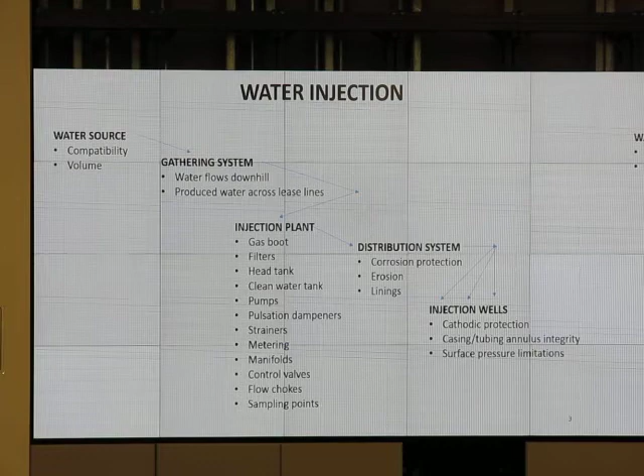Water flood plants can be in a lot of places. This is the Wabash River in Indiana, and all the buildings are up on 8-foot stilts, and most of the time you can drive to the water flood plant.

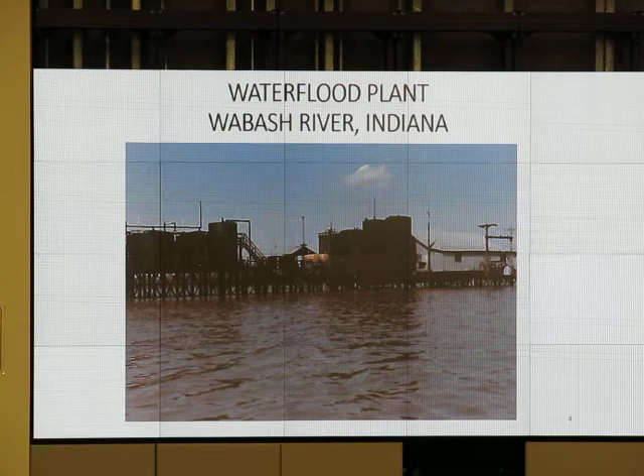The tanks feed the pumps that are inside this station - this is tank battery equipment. But when the Wabash River floods, the only way you get to the water flood plant is in a boat. And then the water recedes, and the only way you get out there is in a four-wheeler. And then it dries up again, and you're on the ground. So 'water plant' and 'water flood' take on some new meanings sometimes.

Water quality - what do we mean when we talk about quality of water? We've got to be concerned about a reservoir that, even though the fluids came out of it, we're going to try to stick it back in the ground, and that water's got to meet certain specifications. Here's some criteria for quality injection water, whether it's going in a disposal well or whether it's going in a water injection well for pressure maintenance. It can't contain particles large enough to cause formation damage. And those particles can be solids, they can be oil, or they can be gas. All of those need to be treated as contaminants in water.

Quality injection water will not cause corrosion. In other words, the water itself, if we have a lack of oxygen, is harmless. If we left oxygen in there with the water, then we've created a corrosion cell.

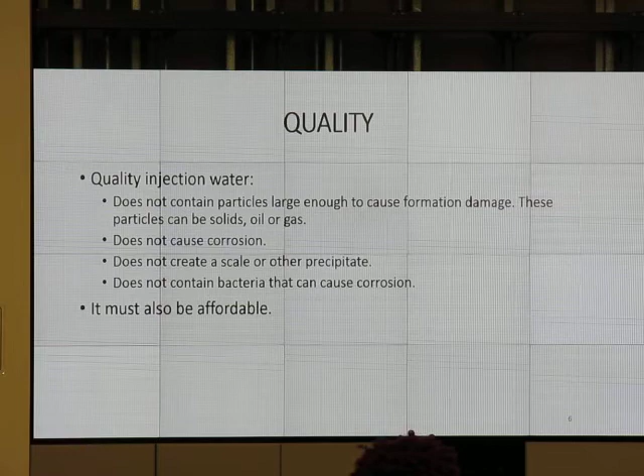And we drink it like it's water. So water can become a very precious commodity, and if we are paying those kind of prices in the oil field for our injection systems, we're not going to have very many economic water floods. There are some ways of treating water, but however we treat the water, it's got to be affordable for the use that we intended.

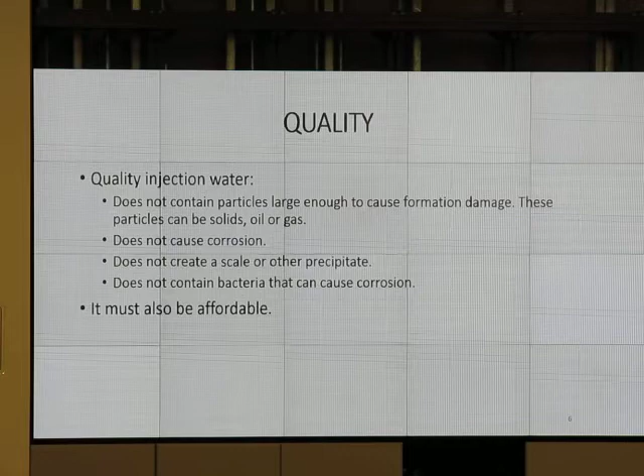There can be multiple water sources. This map or diagram illustrates a large company down in the Midland Basin putting together a gathering system for water distribution. Notice this starts north of Midland, with pipelines connecting all the way down into Reagan County. This is almost 100 miles long.

In that system, they're bringing in produced water from tank batteries. They'll be bringing in brackish water — formations that have some contamination, so it's not potable, can't be used for human consumption without additional treating. There will also be effluent from Midland and Odessa brought into that line. All of this is designed to bring water together that can be used for fracking and drilling.

Finally, the system can also take water from USDWs. What's a USDW? underground source of drinking water — you've heard of the Ogallala, a freshwater aquifer. So fresh water can be combined in there too.

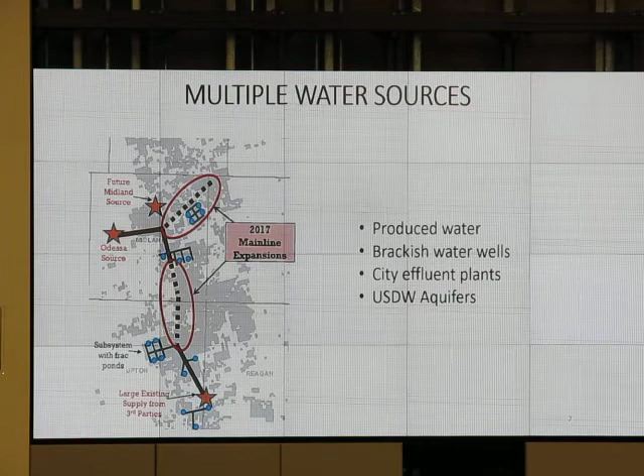Has anybody ever used a Stiff diagram? Have you heard of it? Have you taken a fluid mechanics course? Do you have McCain's book? It's in there — you guys didn't study this, did you? I've already talked to Dr. Gamati; they're going to study this from him.

A Stiff diagram is just a way of looking at the ions that are in water. This is copied right out of McCain's book — positive ions on one side, negative on the other. Fresh water, with no chloride content, looks like a straight line, hardly anything in it. Seawater, on the other hand, has high concentrations of chlorides and other salts.

Every oil field water has a unique pattern to it. Those contaminants, those salts and ions, will be unique to the different produced waters we see. What we want to do is avoid mixing waters that would create a precipitate. We get a lot of calcium out of one source, a lot of CO2 out of another, and when we mix them together we get calcium carbonate — we're forming a scale.

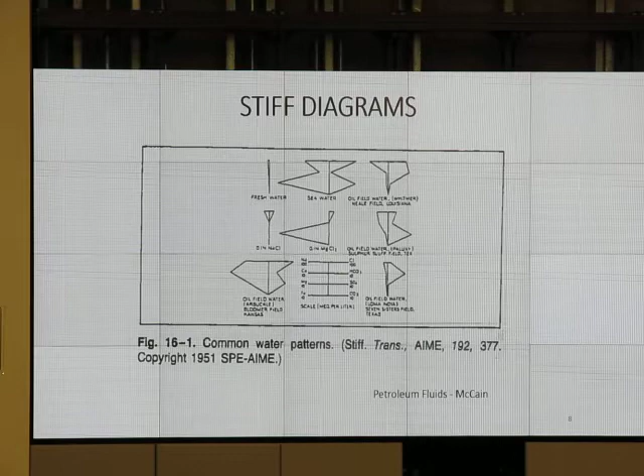There's lots of water treating technologies out there because it's popular and being highlighted, so people think let's just recycle the water. Not all produced water can be economically recycled — all produced water can be recycled, but not economically — and there's a cost to doing everything. One thing to remember is that produced water doesn't have to be cleaned up to drinking water standards to be used in the oil field. We can live with a lot of things in the water that we couldn't if we were going to drink it.

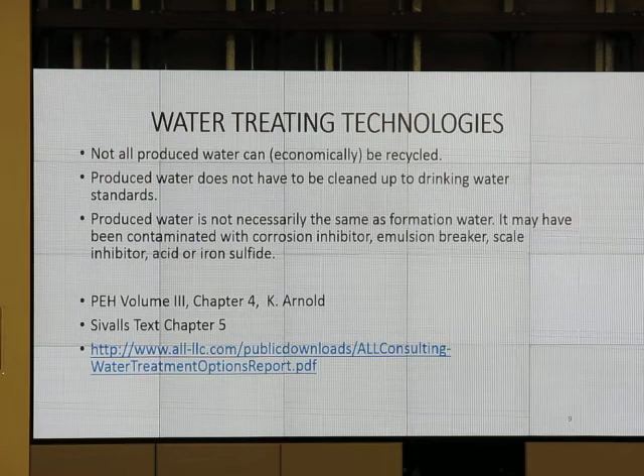The other thing to remember is that because the produced water came out, it's not necessarily the same as the native formation water. Once we brought that produced water to the surface, it's been contaminated with things like corrosion inhibitor, emulsion breaker, scale inhibitor, acid, iron sulfide — all of those things we've added to the water. So you might say it came out, it's at the battery, I can stick it back in — but not necessarily so, because in the process we've changed things.

One of the most expensive methods is reverse osmosis. Some of you saw the RO plant at the Oxy facility for treating water. That's very, very expensive. And another thing to consider is that even though these processes get the water into good shape, they can create other waste streams that have to be handled.

If we've knocked out these salts, what do we do with them? There's a plant tied to a brackish water facility in El Paso, Texas, that claims they can take brackish water produced from that area, treat it at the plant, and then turn that treated water straight over to the city of El Paso for distribution in water lines. And every salt they took out of that plant, they have a product they can make from it, whether it's wallboard for construction or fertilizers. Everything they took out of that water, they've got an end product they can make and use. They're going to try to sell you all of these things when you get out as an engineer.

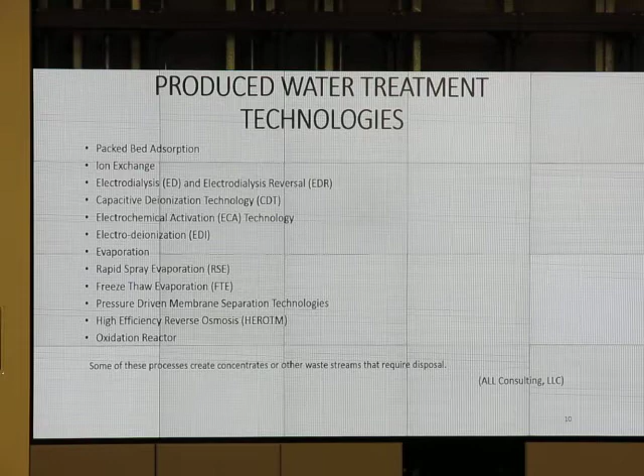The guy's going to come in giving you baseball caps and free Cokes, and he'll tell you he's got the latest, greatest way to treat produced water. So you want to make sure you understand it and can put some economics to it. It probably really will treat the water, but can you afford it?

Okay, now let's look at system design pressure - what we have to consider when we start handling the fluids. First of all, we talk a lot about average conditions.

This picture was taken in Maverick County, down on the Mexican border just outside Eagle Pass, west of San Antonio for those not familiar with Texas. Average temperature year-round is about 60 degrees. But in the winter of 1983, it froze solid for two days.

We had just laid fresh injection pipe on the ground that wasn't screwed together - it was fitted together, with a bell end and a male end that were put in a machine and jammed together. It went together fast, we could lay it fast. It was steel line with a liner in it, good corrosion protection. This winter hit, and you can see what happened at the batteries and around the wells where the pipe burst. Every bit of that Ziploc-type pipe we put together separated at the joints, leaving piece after piece of 20, 30-foot joints just laying in the pasture all over the place.

We designed for average conditions and didn't take into account the extremes. You need to understand the endpoints.

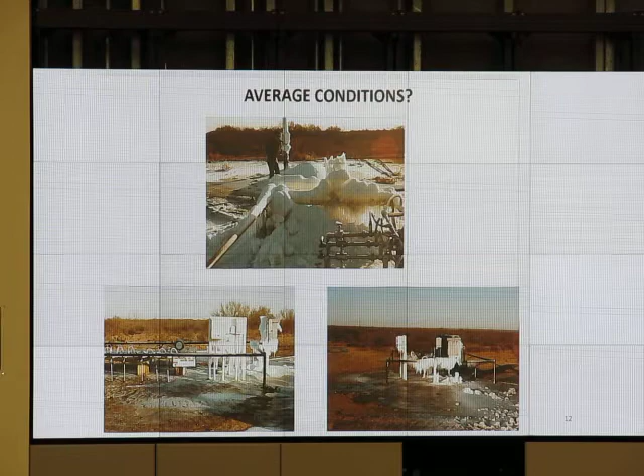Let's look at system design pressure. How would we even guess what we're going to need if we're doing a water flood, and what that pressure has to be? We ought to design so we can at least reach parting pressure in our reservoir with our injection well. We don't want to inject above parting pressure generally, because what are we doing then? We're fracking, propagating a frac. A frac goes straight to a producing well, and we water out the well. So we want to go right up to that point, but probably never go over it.

So if we have a well at 5,000 feet with a fracture gradient of 0.65 psi per foot, and we're injecting water that's a little salty at 1.06 specific gravity, we'll look at what pressure we can put on that wellhead. Just for a starting point, let's assume that 10% of our average pump discharge pressure is going to be taken up by piping friction getting to the well.

So what pump discharge pressure would we have to design for to get to that well with the pressure right above parting pressure? Well, the frac pressure is simply the 0.65 gradient times 5,000 feet, giving us 3,250 psi on the surface.

We've got a hydrostatic head in the well of 5,000 feet times the 1.06 specific gravity times a gradient of 0.434 psi per foot, or 0.433. Our pump discharge pressure then is that maximum we have to have, 3,250, less whatever we got for hydrostatic.

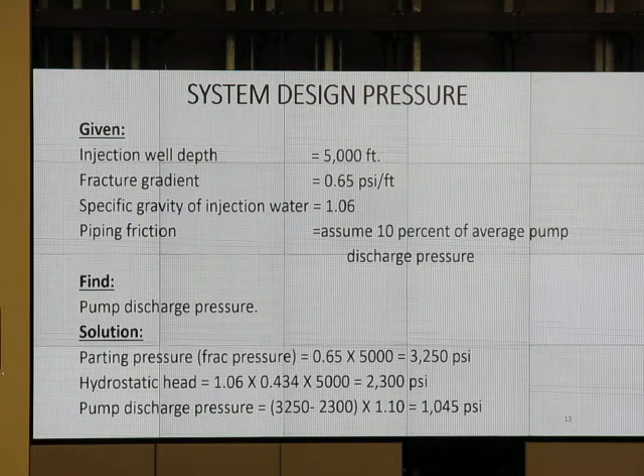And remember, back at Oxy, what were they using for their injection lines out to their wells? Fiberglass. They could put water in those fiberglass pipes, and that was running out there. So they've got to know what kind of pressure is going to be leaving that station.

Let's look at the station itself. And remember, a lot of the things we talk about for a water flood station are going to apply for a water station for disposal as well.

Generally, the disposal stations are going to have wells that can take a lot of stuff on a vacuum. They're not going to be putting up much pressure, or as least as possible. They're going to be injecting into a zone that has a lot of permeability, so they can get the pressure and the water away at minimal expense. Your water flood, on the other hand, you're going to have to clean it up a little better than that, because you're dealing probably with a little lower perm reservoir. You won't have those kind of conditions to work with.

So here's a typical flow path through a water flood station. Let's assume that we're taking produced water. Our flow path would look something like this: we'd go through a gas boot.

Remember, looking again, Oxy was great for the field crew, because right in front of their gun barrel, they had that big pipe with a bigger section on the top. That's what a gas boot is. So we'd separate that final piece of gas out of the produced water before we go into a produced water tank, and we'll look at the innards of a produced water tank in just a second. That helps remove the gas.

It's also going to help separate any last oil that might be carried over in our produced water. And remember, now we're treating oil as a waste product, a contaminant to our water. We'll ship it to a skim tank, let it overflow to the skim tank, and then we'll ship it back to the battery for treating. We get good produced water out of the tank.

The next thing we're probably going to want to do is filter it down to, say, a 25 micron level. To do that, we've got a couple of filters. And why do I have two? I could probably design one that would handle the flow rate, so why would I want two? Just in case one gets blocked.

These are what's generally called rapid rate sand filters. If one of them plugs, if it gets oil on it, I've got to stay in business. I've still got to get rid of my water, and I want my water flood pressure to be held up. I don't want to lose that pressure bank that I've created. So while I'm pumping through one filter to my wells, I can be backwashing the second filter.

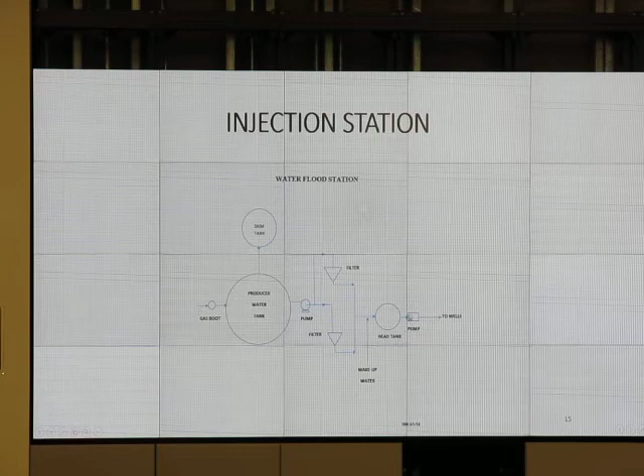What we probably would have if we had a disposal station, we wouldn't have the filters. This produced water tank, in effect, would become like a big gun barrel. It's going to be a final stage where they separate oil that gets trucked in there with the water. And believe it or not, oil gets trucked in with the water. A lot of these guys with these disposal stations set up the side of the road make a good living on the oil they skim off. So the disposal station would have the produced water tank, a skim tank, they're going to get the oil, and then they're going to go to a head tank and a pump and to wherever their disposal wells are.

Why would we do that? Yeah, we're creating a spinning motion. One of the ways of getting liquid gas separation is change of direction. So as soon as we're coming in, we're creating that change of direction. We're doing this slow enough so that the gas can go out the top, water can go down, but water goes down slow enough as well where it's not keeping gas from coming out.

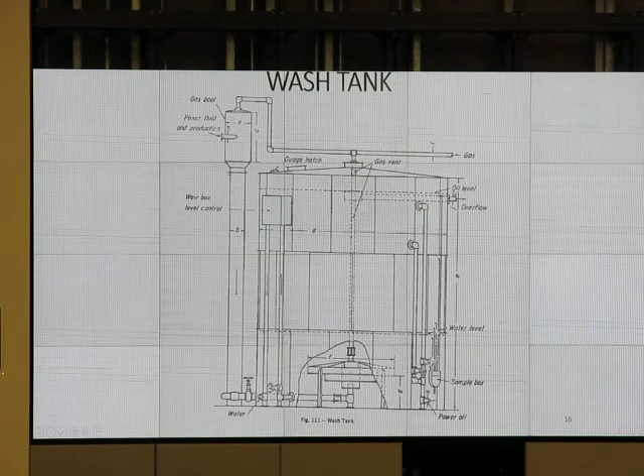Oil can be skimmed off the top, water going over to our next tank.

Tanks. Cone bottom tanks make for easier cleaning. What's a cone bottom tank? Yeah, okay, so tank with a cone in it, right? Like ice cream. So it has a taper from the edges towards the middle, and then the tank skirt around those edges. You can't tell it from the exterior, but it looks just like a solid, straight up and down tank. But there's a cone bottom in it where the solids can fall to the middle of the tank. You've got a line in there where you can clean that out. So a cone bottom tank made for easier cleaning, especially if we're going to be using it in our water cleaning applications where we're going to be looking to drop out sand, iron, rust, things like that.

Hold gas blankets on tanks to exclude oxygen, for corrosion protection.

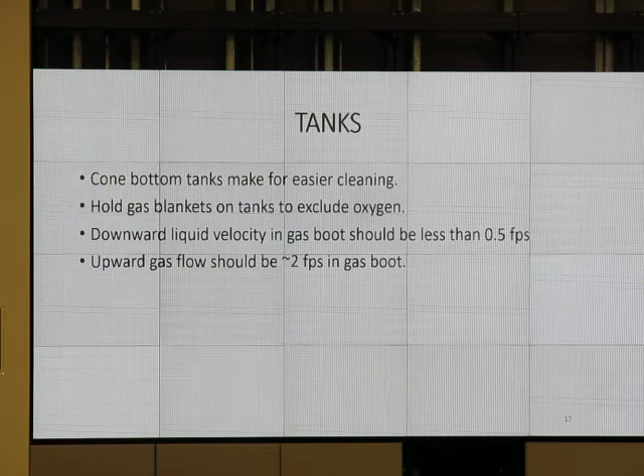We talked about velocities in that pipe, and you've been taught fluid mechanics on separation terminal velocities for gas bubbles, depending on micron size. As a rule of thumb for a quick design, the downward liquid velocity in a gas boot should be less than 0.5 feet per second, so it won't carry the gas bubble with it. The upward gas flow should be about 2 feet per second in the gas boot. Those are still pretty slow, but it'll give you a sizing criteria to build that gas boot.

Filtration. Media filters are the most commonly used type. The media in these containers is sand, anthracite, which is a type of hard coal, crushed up, or graphite ore. As you flow through those, you'll take out the big pieces in the filters.

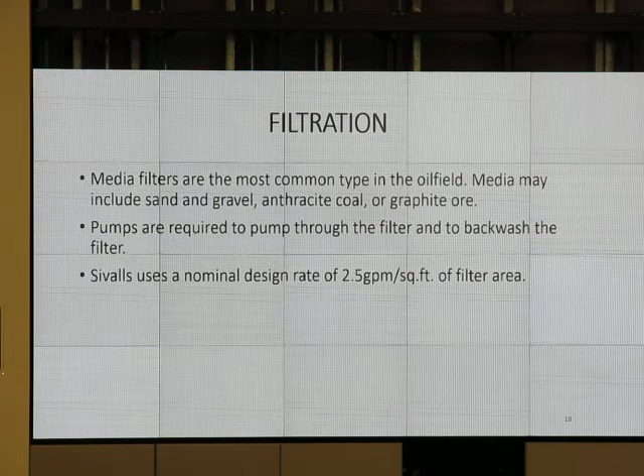Pumps are going to be required to pump through those filters. You can't just gravity flow, because most of the time you're going to be introducing flow from the bottom, or you will have to flow through the bottom. You're going to have pumps for some of the cycle. In the Sivalls Design book, we don't go into this in class, but there's a section on rapid rate sand filters. Their recommended design rate is about 2.5 gallons a minute per square foot of filter area.

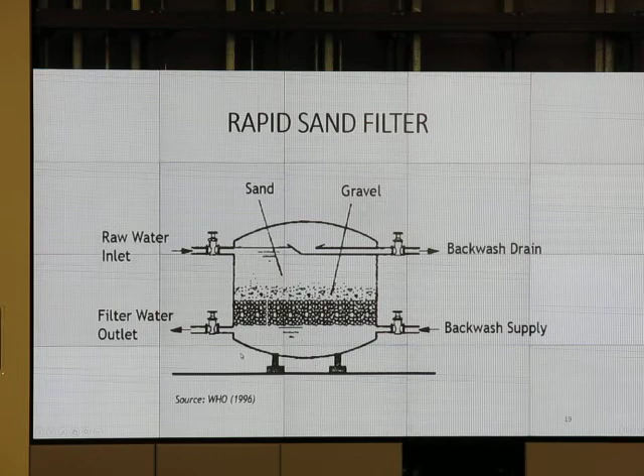Notice the source of that is the WHO, the World Health Organization. This is one of their drawings because these are the first stages in water treatment plants that are very economical and used in a number of places in the world where they're treating water for drinking water. A lot of municipalities use this same principle, they just build big concrete structures and run their water through similar filters.

This reminds me too that not all engineers think alike, because you don't always agree on things.

I worked for a company that at one time we were buying lots of properties, and our favorite companies to buy from were the big companies. We could go in and make money coming behind them, fixing things they hadn't done, and operate a little cheaper. When we do that, we do what's called due diligence trips. We go around to the fields, look around, see what we were buying, and make sure we understood what we were getting into. We went into this one building, tall as this ceiling, with corrugated tin around it, and walked in, and there's this huge filter sitting out there in this water flood near Big Spring, Texas.

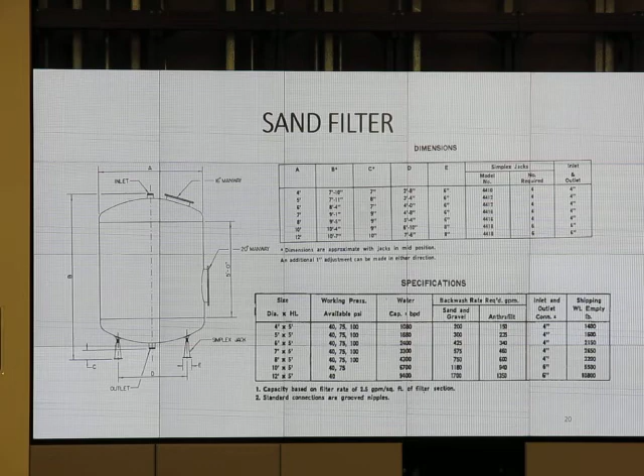Big filter sitting in there, had new piping gone to it. This was an old water flood, and the filter had never been used. The Midland office for that major oil company was a district office, and the regional office was back in Fort Worth. The regional office decided they needed more filtration on the water, and the district office said no, we don't. Regional office won, so they bought the filter and sent it out there and said hook it up. So the district office hooked it up and never turned it on. That's a true story, which is hard to find in the oil field, but it tells you engineers will have different opinions about things. Just because the guy's the boss and came from above, they did it. Seems strange, doesn't it? That could never happen. Happens.

Injection pumps. We're not going to go back over all the criteria for designing pumps. There's been a couple of lectures, number 8 and 9, about centrifugal and PD pumps. But when we make our choice for the injection pump we want to use for a water flood especially, we make it on 2 criteria: what's our capital cost and what's our operating cost. Because you can get high pressure centrifugals, and relatively high volumes out of PD pumps, we've got to look at which one is more efficient.

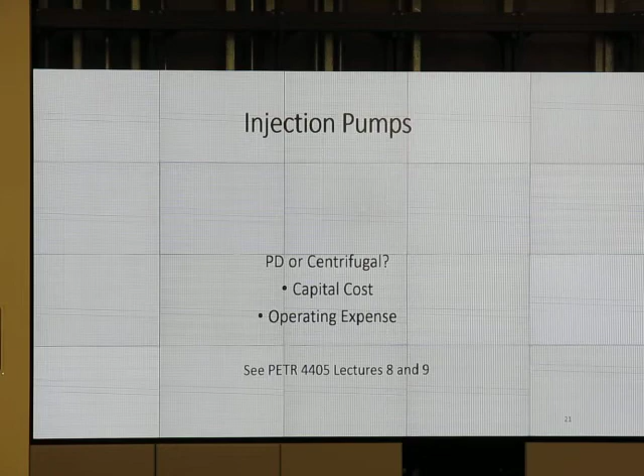If I had a pump to choose, one centrifugal and one PD pump, which one would be more efficient? The PD pump is more efficient. What if it costs more? Then I've got to look at what's the cost of electricity to run those, or other power that I put on that pump.

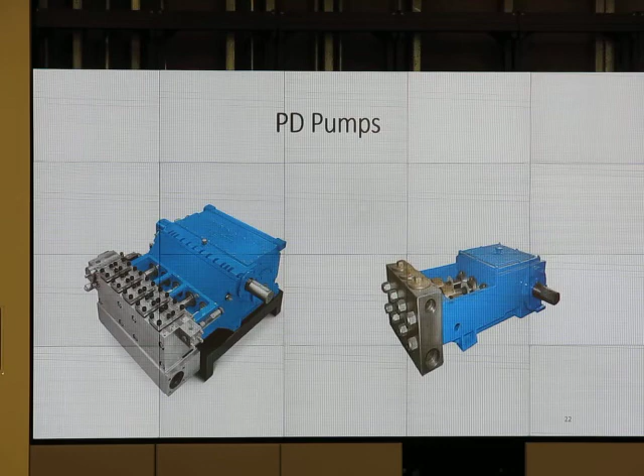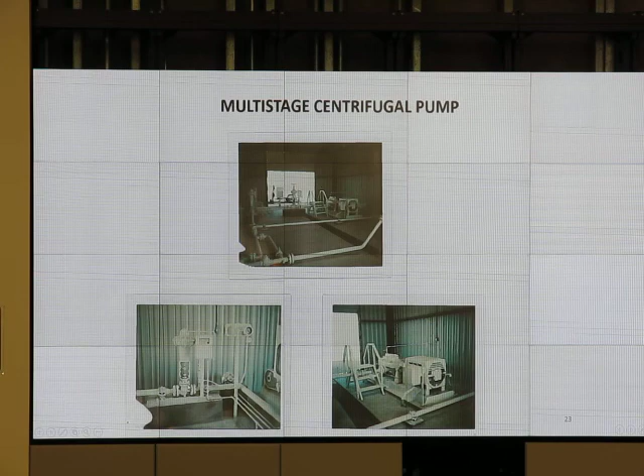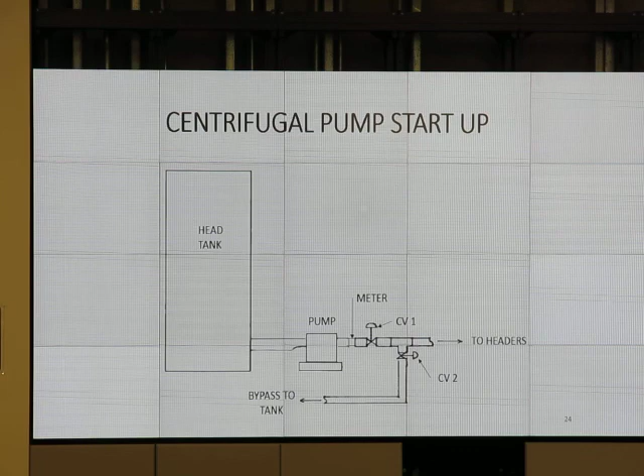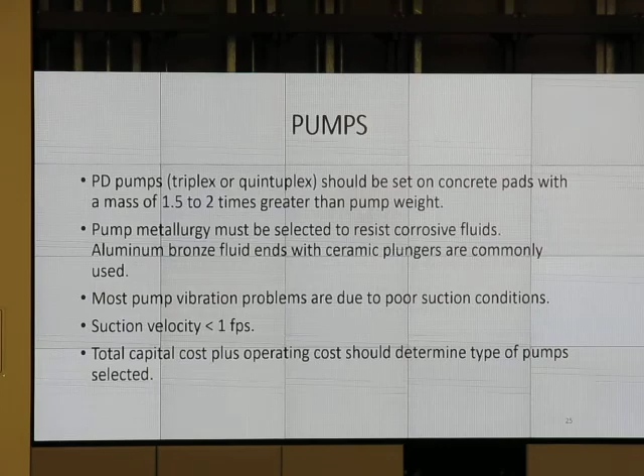So our pumps have to be set on concrete pads, especially PD pumps, with a mass 1.5 to 2 times greater than the pump weight, and how the mass is distributed is important. The pump metallurgy has to be selected to be corrosion resistant. Most of the time it'll be an aluminum bronze fluid end. You can build them out of stainless steel. A lot of frac pumps are made out of stainless steel just for that, plus the higher pressure rating. And then ceramic plungers are common. It doesn't have to be steel, but those are all corrosion resistant metals and materials that can be used in the fluid ends.